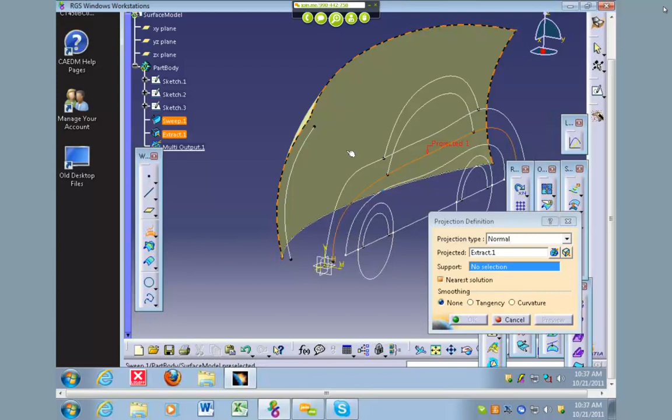That is what you're projecting onto. And then we don't want to go normal. The support is the surface we made, the sweep. If we do normal, it's going to project this shoulder along that surface.

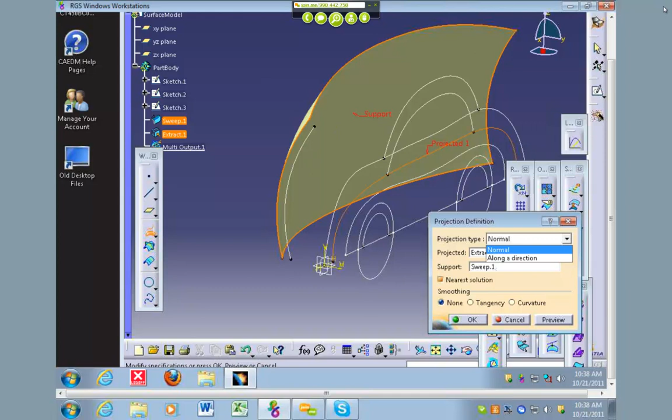We don't want to do that for this. We want to do along a direction, and the direction we want to go depends on the datum we set up. But if I scroll up here, you'll see that we want to project in the Y direction, because we want this thing to go that way. Now this is the positive Y direction going this way. So we want the negative Y.

Which support did you pick? The support is the surface. Oh, the surface. Uh-huh. Yep, so you want the Y component. If we hit preview, we'll see that the shoulder's on the surface.

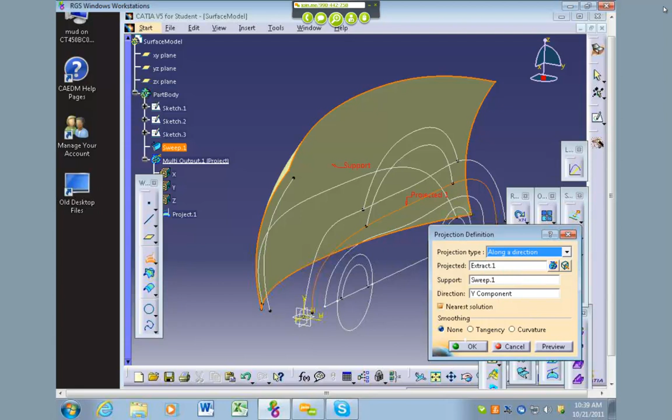Yeah, you want to do along direction instead of normal. And then you'll click on the Y component, and it will project that surface onto the vehicle, or it'll project that lower control arm onto the surface.

Now this is a little bit way too curvy for my tastes. So I'm going to come back in here and straighten this up a little bit. Looks pretty good. There we go. That looks a little straighter.

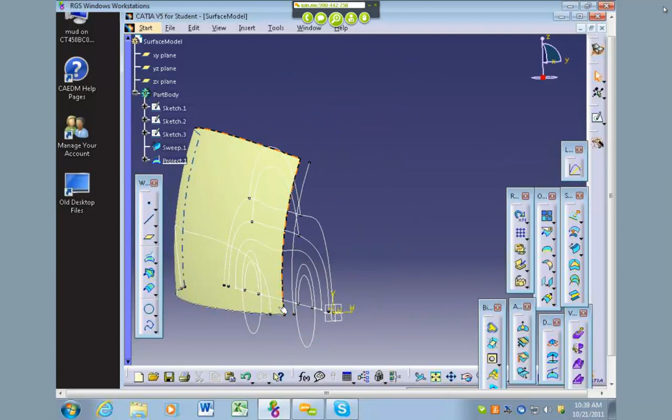So now what we want to do is split that surface so that all we have is just the shoulder. So there's the split tool.

The element that you're going to cut is always the object that you want to cut. So you can think of sheets as paper when you're using the split tool. This is asking for where's your sheet of paper you want to cut, so you'll select this surface. The cutting element is where you place your scissors, so we want to cut along this projection here.

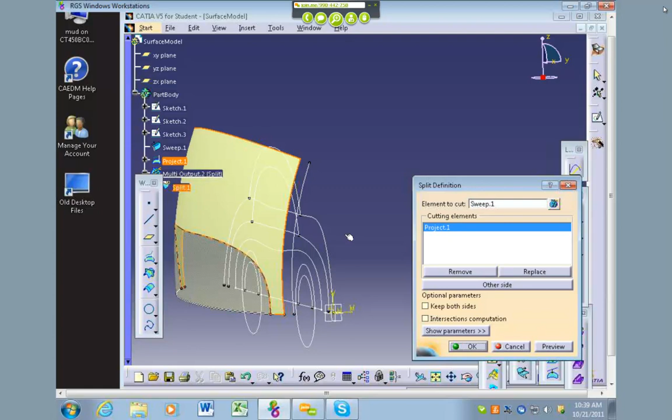Now we don't want to, when it goes gray, that's the stuff that's going to be removed. So we want to do the other side, because we want to keep that. We'll go ahead and press OK. And now we've basically got the lower side of our vehicle. Okay? Yeah.

Okay, let me hop over there and see. Yeah. Real quick.

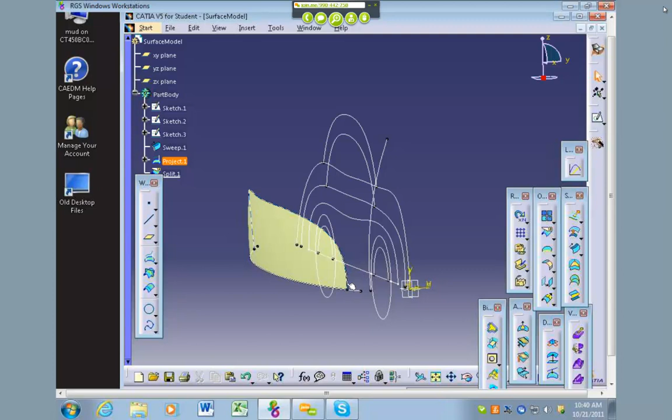One thing I did want to point out, if you do get an error saying it can't cut, the reason is probably because this line doesn't go all the way to the bottom. So like when I created this first sketch originally, if this line is not in line with the projection, like maybe it's up a little bit here, that would cause it not to be able to cut the surface, because it's almost as if I'm just cutting inside the paper, but I'm not actually going the full path.

So you need to make sure that your sketch controls where your scissors path is. So if you get an error and it says I can't cut this, chances are it's because you're most likely trying to do a hole punch type style rather than actually cutting it from beginning to end. So you need to come in your sketch, modify it, and fix that so that it should work.

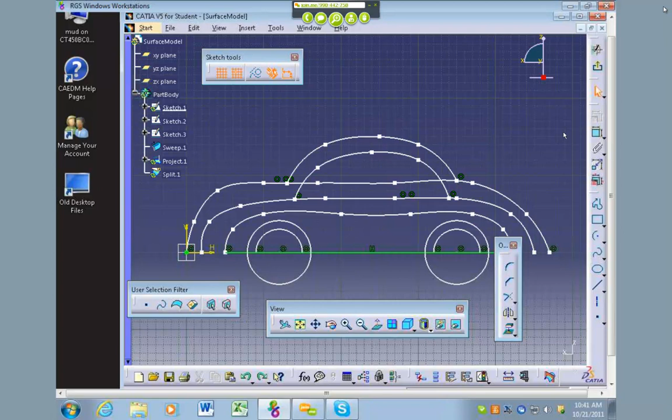Okay, so any questions so far? Are we good? All right, I'll keep going.

All right, so the next thing we want to do is create some cross sections so we can develop the hood of our vehicle. The more cross sections you have, the more control you have over what the style of the hood of your vehicle looks like. To illustrate that a little bit better, I'm going to create some planes, and I think my toolbar is missing, so I might need some inserts.

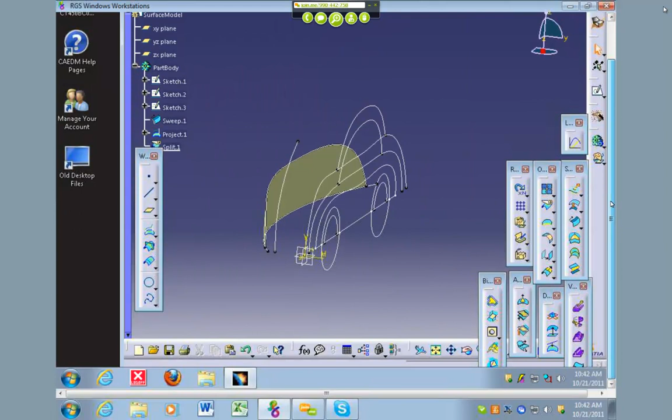Not seeing it. Let's see if we... It's to the left. Oh, there it is. Thanks, good catch. I got to stop moving my toolbars around too much.

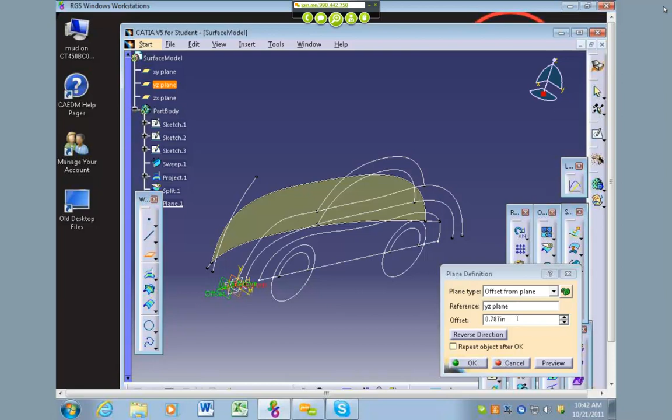All right, so we want to do an offset. We want to do an offset from the YZ plane. And we want it to probably be closer to the center of the vehicle. So let's just kind of get a normal view here.

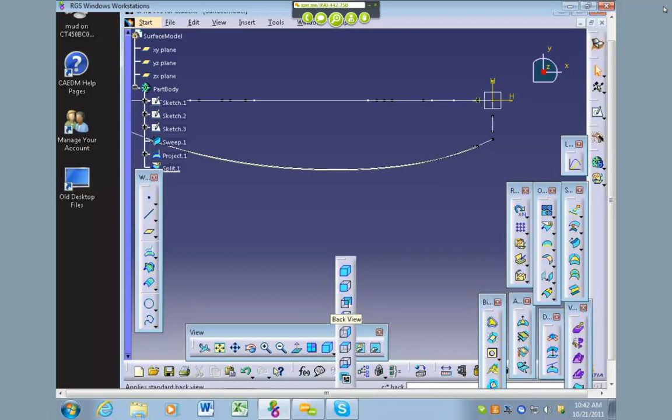Let's get a normal view of this plane. No, not that one, sorry. Let's see, I think it's the right view is what I want. Yes, there it is, okay.

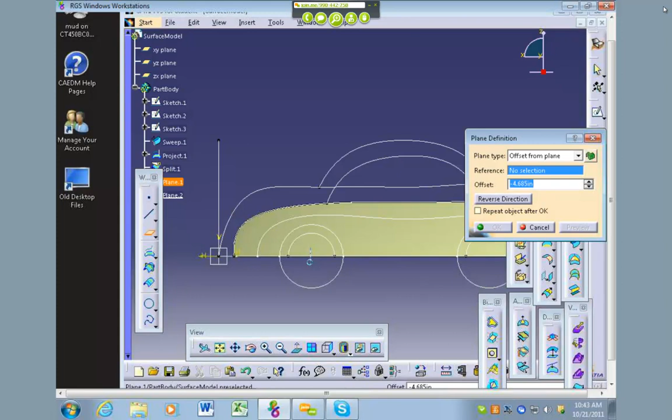So we'll go ahead and do an offset plane from this plane, and we want to bring it here to about the center of your wheel. You'll create another plane, and offset from this one, and we'll bring that down here to about the center of that other wheel. So this should be sufficient for right now.

Yep, so I created 2 planes. Okay, so that's kind of our situation right now. We want to intersect where that plane is and where the shoulder sheet is, and we want to create a point at the top of this line, so that way we can get a line that goes from the top shoulder here, or the top of our vehicle, down to that point. So we want to do an intersection.

To do that, let's see if I can remember how to do this. It's been a long time, so I'm not seeing the command right off the top of my head. It's the same thing as projecting, the same little box. Yeah, I guess you could do it that way. Oh, it's in the same menu. Oh, there it is right there - intersect. Give my computer a second here to stop thinking.

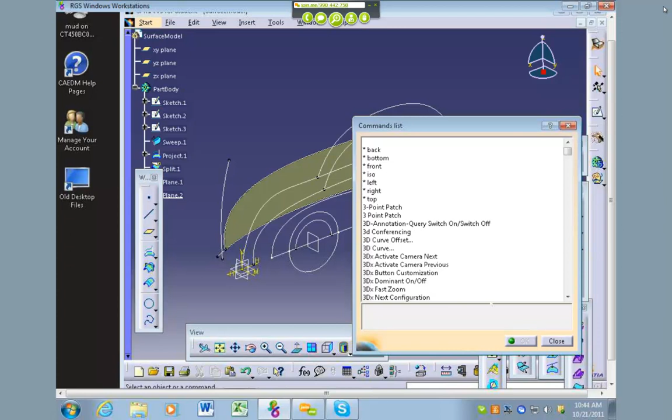So if we do an intersect, we can do the first element, which I believe is our plane. The second element is the surface. And if we hit preview, it should draw a line. Perfect, so there's the first intersection.

We want to do that again. Wait, it should draw that line? Yeah.

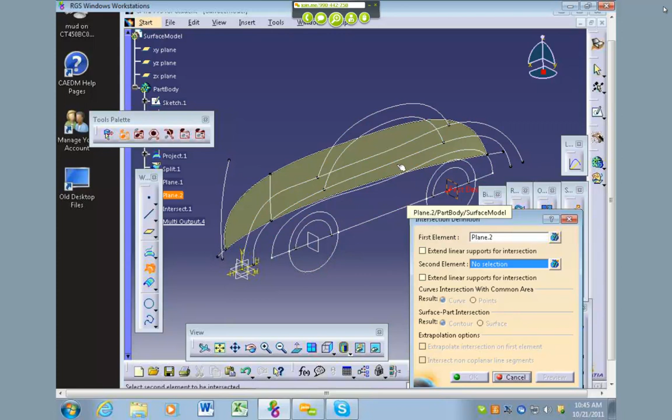Yeah, so if you do an intersection here on this plane, and then do an intersection of the surface again, you should get another line, and that's perfect. So we'll get 2 intersection lines right there. Okay.

All right, so now we want to start creating some cross-sectional curves that we can use to define the hood of our vehicle, the trunk of our vehicle, and kind of part of the shoulder. So we'll create a new sketch, we'll do it again here on the XY plane.

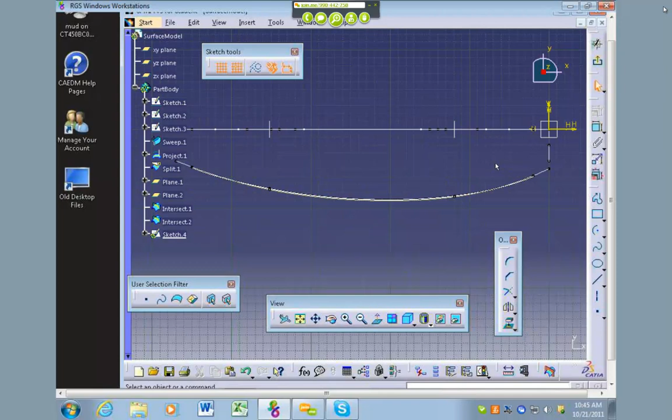And our first one, we want to start at the same spot as the front of our vehicle. And what I usually do is I will create a construction element. What plane do you use? We're on the XY - or excuse me, let me highlight that - we're on the XY plane.

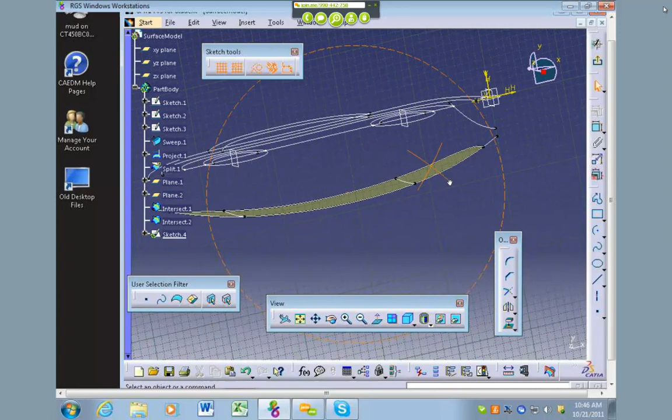I just rotated my view, it came up like this. Okay, so we'll create a construction element by clicking the construction element on, draw a line, and we'll go from the origin out to about right here.

Just beyond it, yeah, so it's straight out, you're going in the Y direction. It doesn't matter, it's how far you extend it. I just like creating a reference line because I'm going to use that to define the spline that I'm going to use for the front of my vehicle.

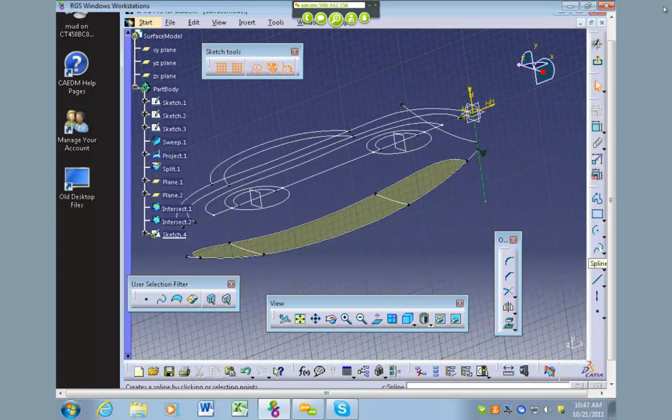Wait, I'm kind of confused, isn't the XY plane the ground? Yeah. So I honestly can't tell at all where you're drawing that line because of the view. Straighten your view out - okay, so you're drawing, does that help? Horizontal, so here's the XY plane, it's the bottom of my car, and I'm going straight out.

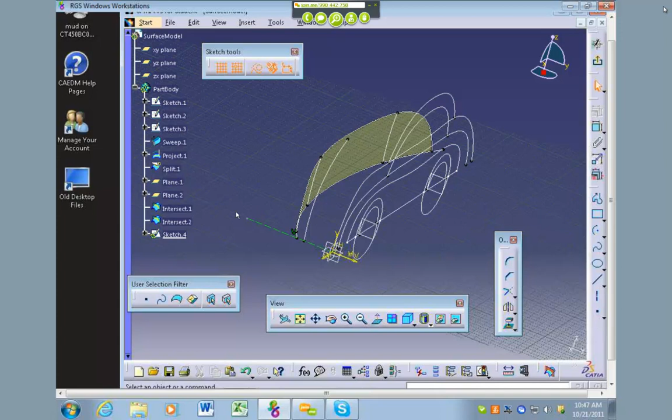Okay, so now that I've got that, let's kind of shift this down just a little bit here. Okay, I'm going to create a spline, I'm going to start here at the beginning. Construction spline? Nope, we want just a regular spline. Thanks.

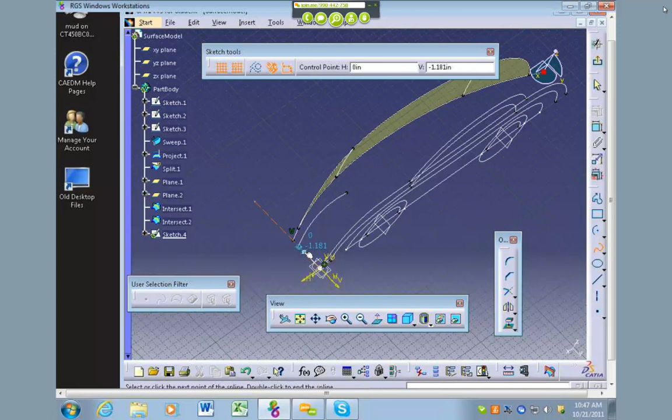So I'll click on the beginning point, and I'll use my second point based on this reference line. And then my last point, I want it to touch on that corner. Let's see if I got it. So you did one at the origin, one on the construction line.

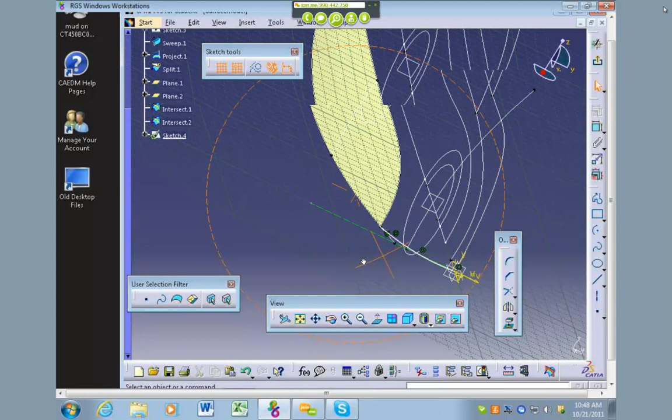Do we need to do a coincidence to make a match? Just leave it close. It should touch. I think for right now we'll be okay because the plane that I drew this in shouldn't have any issues. But if it doesn't touch, I can come back in and constrain it appropriately if I need to. So there's kind of going to be the front of our vehicle, okay?

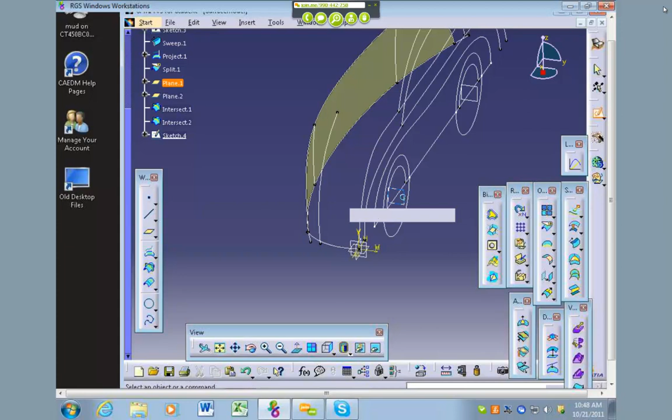We'll hop out of sketch, and we're going to create another spline. This one is going to be on the plane that we just created near the wheel. So I'm going to hop in there and create another reference line. I'm going to rotate this just a little bit. We want this reference line to basically be at the top shoulder if we can, and it just goes straight out, just like the last one.

Now if you need to, you can come in here and see if you can make those coincident so that line is right on that curve. So you need it to be on the top shoulder, the top of that vehicle.

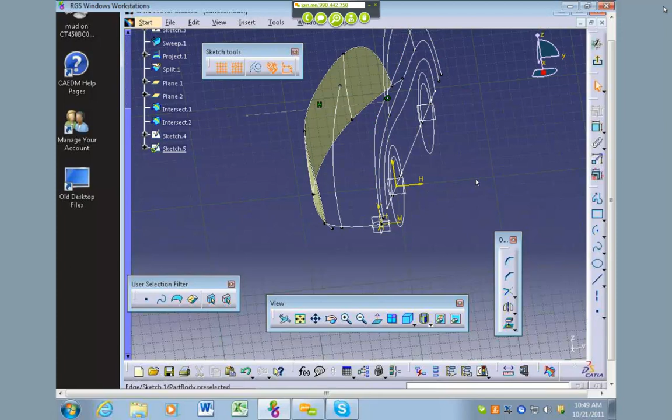You'll go ahead and create a spline, same way we did last time. At that first point, you're going to use any point along that line as your second point. And then the third point is going to be that top point where that intersection line is, if you can grab it. I don't know if I can grab mine, so I'll just end right there and then see if I can make that point and that point coincident.

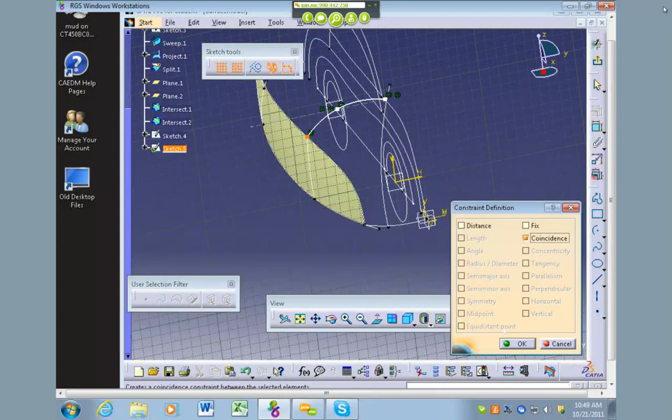So you did the same kind of thing. Same kind of thing, yep. Okay, are we good? Any questions so far?

All right, so we'll hop out of sketch. We're going to do the same exact thing for this back plane right here. Create a sketch, draw a construction element from the top of this line out horizontally, and we will constrain the end point and this curve to be coincident.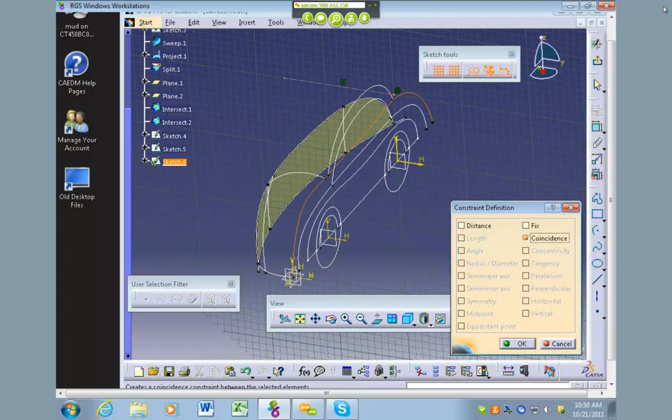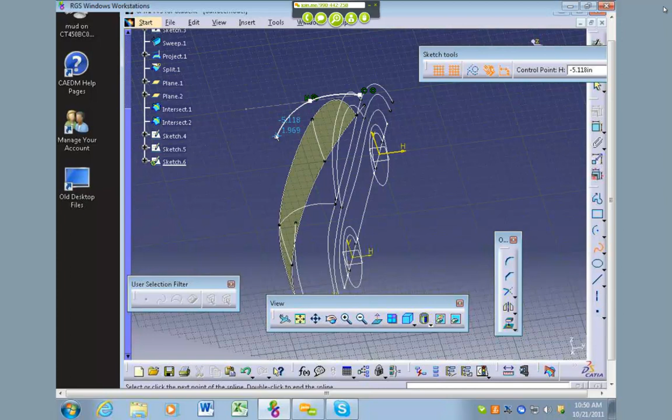I think it's hard to tell if that's on there or not. I can't really see at the moment. What's the point of making that construction element? I just use it as a reference. It allows you to create a spline that keeps kind of a level top where the hood of your car is going to be and the trunk. You don't have to do it this way, it's just for me it's easier if I do it that way.

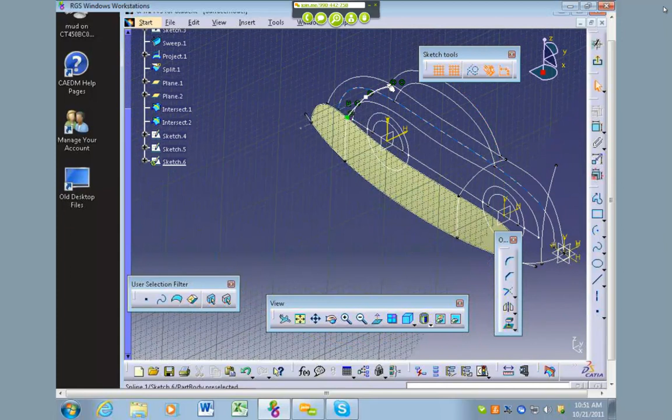Okay, and then we want to make this and this coincident. So you do want to make sure that those points are touching the surface. Right. So we need to do that on the... Yep. That's why we made those intersection curves originally.

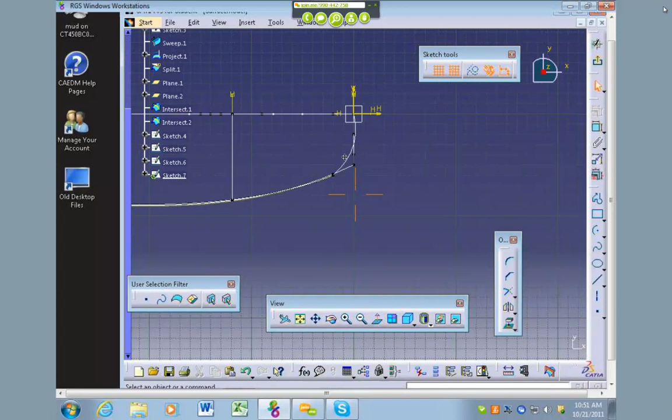Okay, hop out, and we will create one last sketch on the XY plane. We're going to do the same thing that we did to the front of the car to the back of the car, so we're going to create a construction element, bring that out, create another spline: 1, 2, 3. And then we'll have this point and that point be coincident, and then I might want to slide.

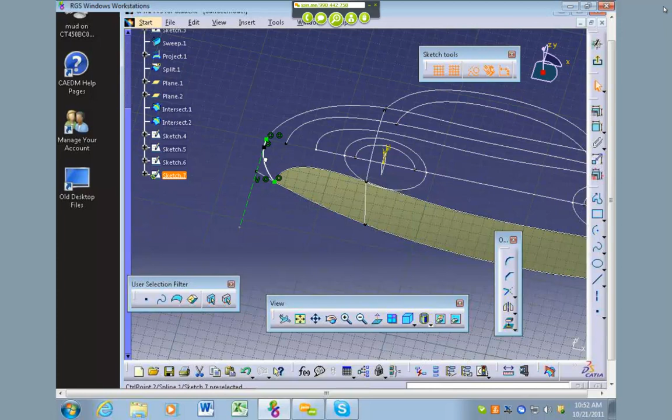Which plane are you on? XY plane, yep, my ground plane. His favorite plane, my ground plane. So you could technically do the first sketch and this sketch on the same. Yeah, and this way you can grab that second point because I have that line there, and I can make it as curvy as I want, but it'll stay on that line. So I can get the reference that I want. See that? So I can kind of make that as smooth or as sharp as I want to. That's why I do those elements that way.

Okay, so when we've got those four sketches complete, we can now basically create the hood of our vehicle. To do that, we're going to use...